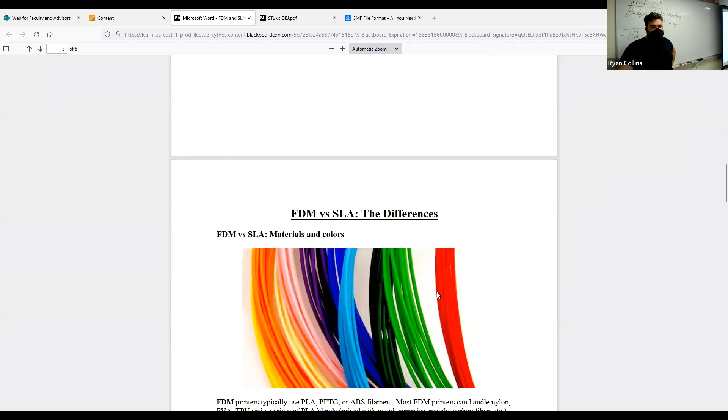You can read through this article in more detail, but that's essentially how it works. They're very similar in how they work, but extremely different in the materials and costs. One of the main differences, as we go into here, is materials and colors. This article is a couple years old now, so there have been vast improvements and changes to a lot of this stuff.

Your FDM printers, your filament printers, will print a variety of stuffs: PLA, PETG, ABS, which are the most common ones. There are also different types now, like nylon, so it'll actually print functional objects as well. Your standard prints—PLA, PETG, and ABS—while they can be strong, these materials are still very much meant for prototyping.

They can be used in low impact purposes, things like phone holders or odd desk projects. But you cannot go print a car part and take it directly to use—well, actually, yes you can, because some people print car parts, things like air ducts and shifter knob caps. So for low impact stuff, you're good, but you cannot print an engine part in these plastics. Again, it's still plastic, so it doesn't matter how strong it is, it'll melt.

SLA has a variety as well. They can very often do a lot of the same, but the big difference is that filament is very cheap and widely available. Resin printers—resin can get extremely expensive, and we're using a Formlabs printer, so their printer resins are proprietary, meaning they are the sole supplier of those resins. You can get others, but these Formlabs resin printers will not accept them. Other brands, other makes—PRUSA now also makes their own resin printer.

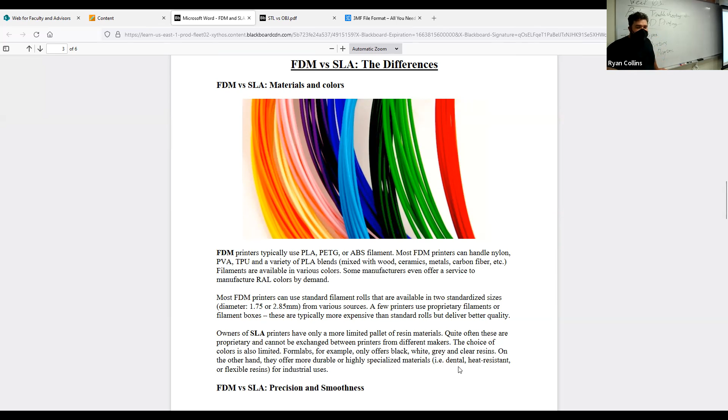So those are the real pros and cons, the big difference. Filament printers are a lot cheaper to operate, not as high quality, tend to have larger build volumes, and a wide variety of materials. SLA printers are much more expensive to operate, but also much higher quality prints, much smaller capabilities. I can't really say the materials are not wide—there's a wide variety of materials for them too, but they are vastly different.

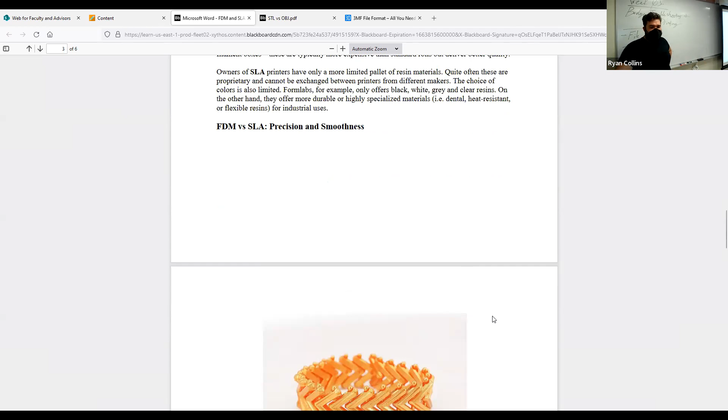So that's essentially the thing, and that's what this goes into here—precision and smoothness. The FDM printers, the filament printers, can be really quite detailed. It is generally quite surprising how detailed they can still get. But again, the SLA resin printers are going to be much higher.

We have some elements of adhesion and removal in 3D printing. One of the main functions of printing is, like I said, it goes layer by layer, so the most important part is that first layer—your object sticking to whatever print bed it has. These PRUSA printers actually have a magnetic table, so you can lift the metal sheet off and it flexes a little bit. Don't bend it in half, but you can flex it slightly. Especially if you have a larger platform, like this first project, it will flex and pop off very easily.

This MakerBot has a rigid platform, but the platform is removable, so at least you can take it out and scrape it off pretty easily. The resin printers do not have either of those.

You can remove the entire build platform, but then you have to scrape it off with a metal chisel or scraper. You don't want to gouge it, so be very careful, because it's a soft aluminum platform. At this point, resin printers are starting to develop aftermarket kits with that same flexible platform capability, making it easier to remove prints.

So, different stuff for post-processing. Filament printers will often have supports, which look like scaffolding around an object. Since we live on Earth with gravity, the printer deposits material and needs a place to deposit it. If your object has an overhang, something hanging out into space, it needs support there. Resin printers have the same issue, only they print upside down - same issue, different orientation. All that means is you have to clip the supports away and potentially sand them smooth.

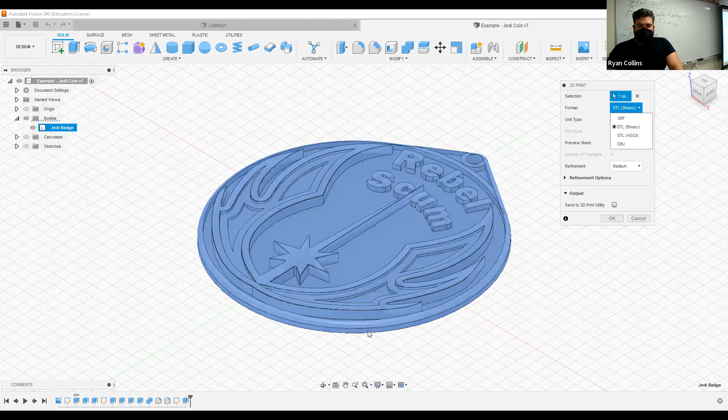Let me switch over. First and foremost, object file or STL. What is the point? What do they do? There you go, you're saving it as a three-dimensional model.

Basically the differences on these, and these are all universal, any of the formats can translate into the slicer programs. Doesn't matter outright, but I need you to know the differences. So an STL, it is the simpler of the two.

Ultimately, what it does, as it says, stereolithography, it's a standard format for CAD software. What it does is it converts the entire model into a series of surface facets and faces made up of triangular faces. Now, the more complex the object, the more faces, ideally.

The downside of that is it isn't really capable of high fidelity. If you have a more complex model, it can do that. It can work perfectly fine, but depending on the quality of the model and the quality of the save, it can start to tessellate, which means it has a variety of broken surfaces and such.

However, it works perfectly fine for simple models, especially with this. We're working with a series of flat surfaces, so really a non-issue, or essentially flat surfaces.

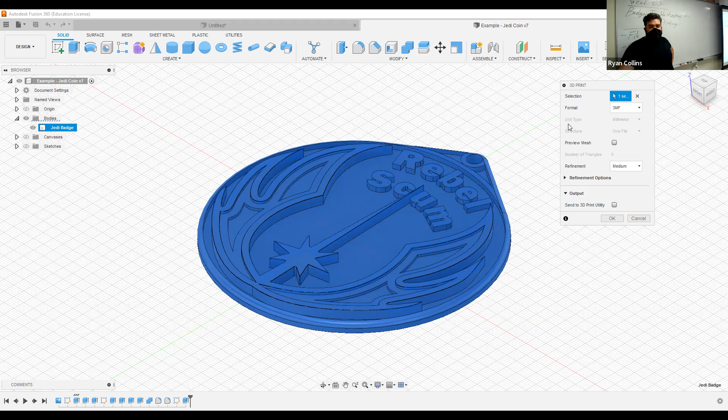All right, so roundabout, selecting file format, 3MF. Okay, let's put it in. I'll just put downloads, Jedi badge as a 3MF. Save. Okay.

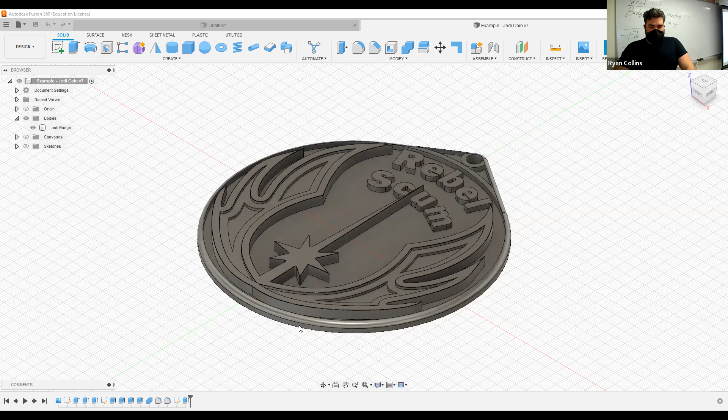All right, so I've saved my file now. Let me just go to full screen share here. So we're going to bring up, oops.

First, the slicer programs we're using. First up is PRUSA. I just updated all this, so it's giving me all the stuff.

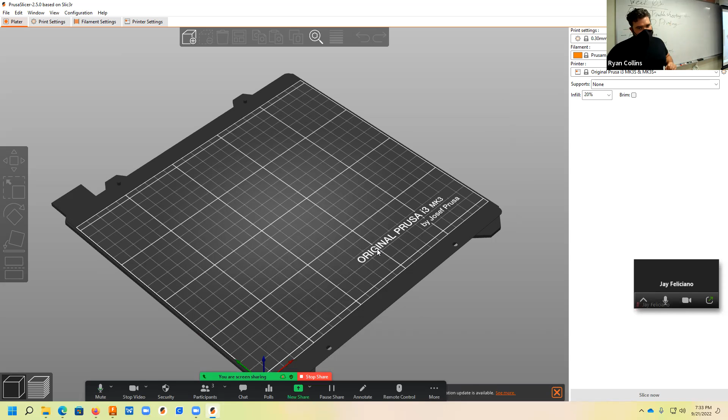So this is the two PRUSA printers we're using here. First up, you'll see if it is formatted properly, it is a virtual rendering of the print platform. The great thing about that is you get a sense of scale of your object. Let me bring in my object.

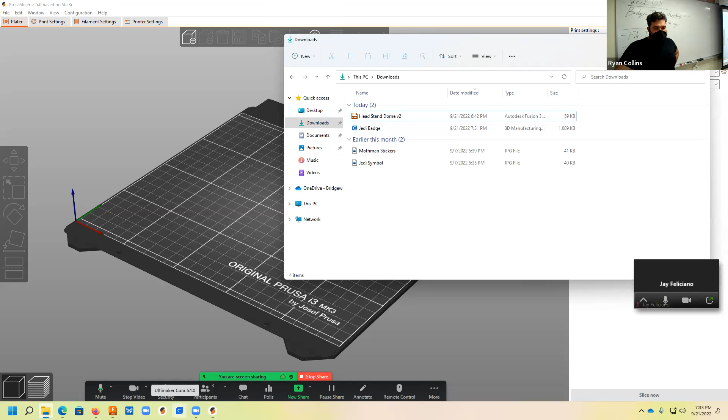You can, of course, use the file search or just drag and drop. Either one works. Open up, Jedi badge. Now currently it has a little C icon because this computer is set up to use CURA as its main one, but same diff. Drag and drop, plop.

So right there, you can already see how big this is relative to the scale. The print bed is, I believe it's 220 millimeters across by 180 deep, or 200, I can't remember at the moment. But this is also why I was saying that sticking with metric is a good idea, because it translates more easily into these slicer programs.

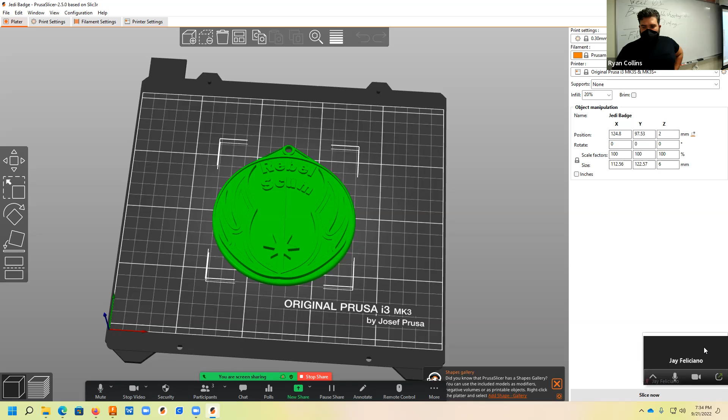So what I have here, let me get a better view switching over to actually the PRUSA. This is the virtual environment. I can see how big my object is. If you wanted to resize any of that stuff, we can do that.

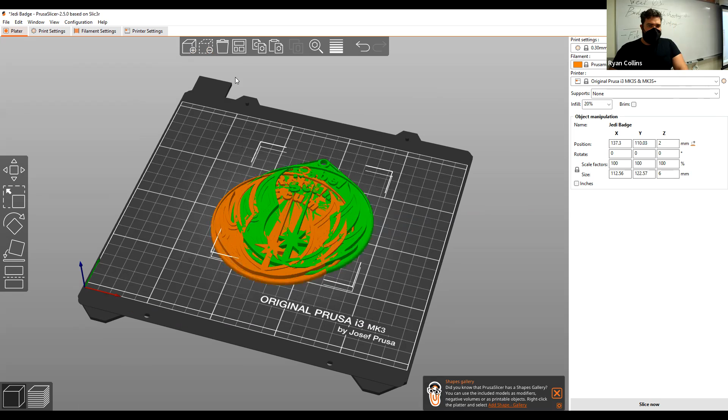You can also arrange multiples. I can either use the plus minus symbol here, or select the thing, copy and paste the second one. The icon up here is arrange, or press A. It'll automatically arrange for you. But you might find times that you're going to need to arrange these manually.

That's fine. So let me just delete one of those. Use the arrange tool again. So to get you familiarized with the general format here, one, you have your standard plater tab.

Second is print settings. Third is filament settings. Oops, wrong click. Fourth is printer settings. For the most part, we're just going to be using the plater and occasionally the print settings.

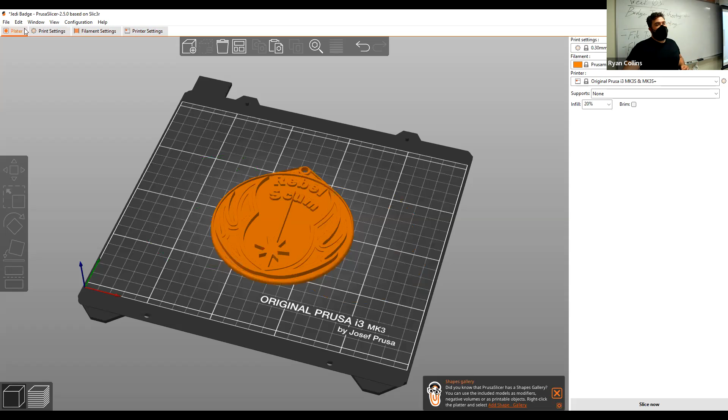Once all this stuff is grayed out, you just have to select your actual object, then it'll bring up stuff. So you have your move, standard move, or you can just click and drag it around. Now with this, it automatically will bring whatever face it is modeled in your program in as, in the same orientation.

If it's differently oriented, it'll bring it in as it's oriented in the program. So if you built it on your XY plane, it'll bring it on this. If you built your object on the XZ plane, it'll bring it up flat in front of you.

So if that happens, you have the other options here, scale. You can grab it. You have these different cubes, which relate to the different axes. Green, still the Y-axis, front and back. These are going to, if you grab just one, it's a non-uniform scale, non-uniform squish. Don't like it? Control Z.

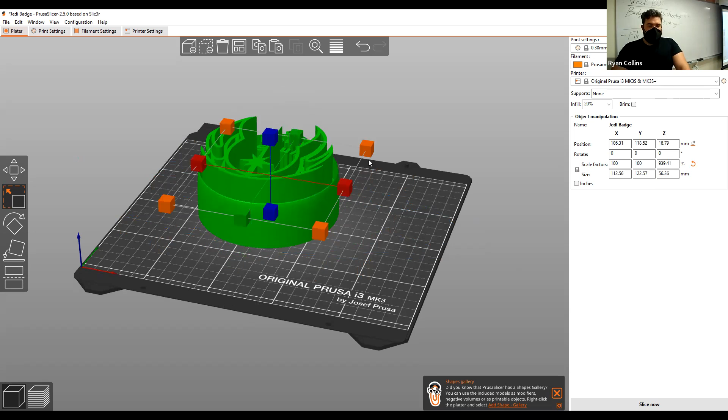X, still the X-axis, still left and right. Same deal. And again, Z, vertical stretch. Now it's like a big cake. The outliers, the orange, that's your uniform scale.

Alternatively, go on to the platform to the right, the tool selection at the right. Let me just Control Z that. You have position, that is moving. So if you want to put that numerically, you can do so.

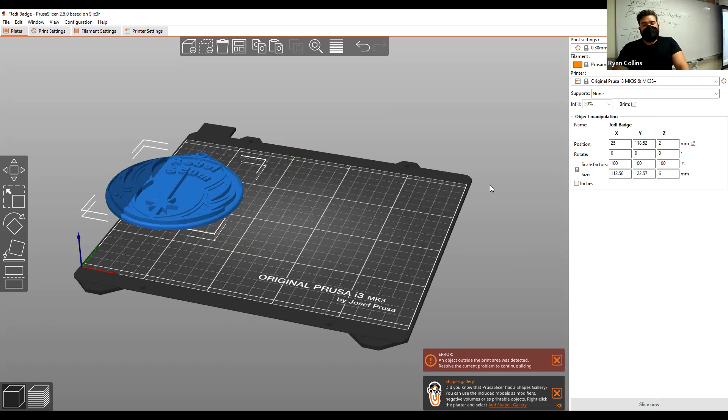Say, I don't know, 25. Snaps it all the way over there. It's selecting from the center. So don't use that. I would recommend if you need to move it around, just drag it around. You can again drag it.

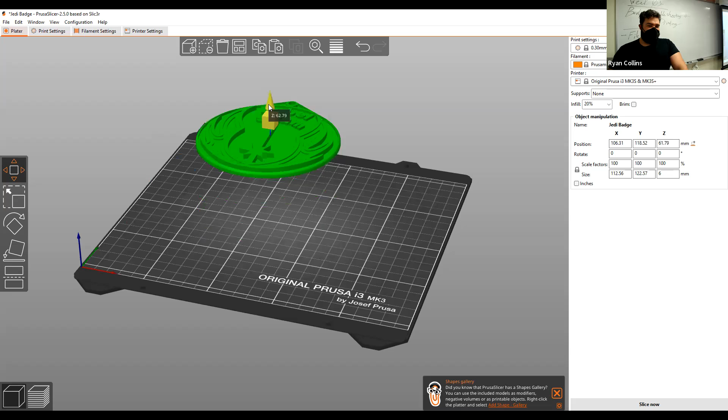However, it's only going to move in 2 directions. It will not move up and down. That you actually have to grab one of the move tools. So select the actual move thing. You can then use the Z-axis cube to move it up and down. No need, there you go.

Rotate can be done numerically the same, or you can use the move tool. Right below is the actual rotate tool. So you click that, it brings up multiple orbits, so it allows you to rotate that sort. So if you need to do that manually, any of that.

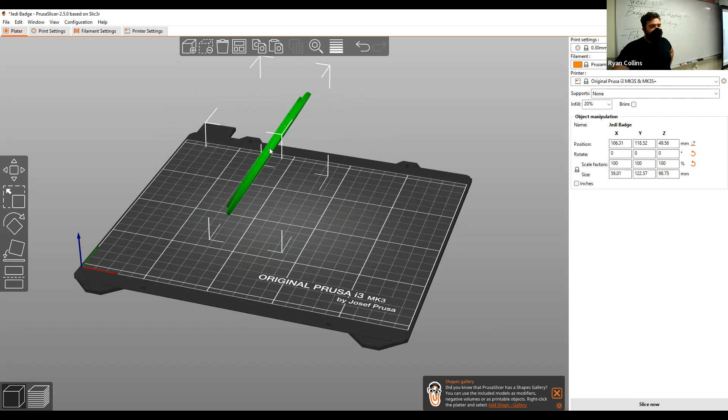All right, next tool, very handy. Say you have modeled your object or whatever it is, however it's been imported, it's on a weird axis. Well, I don't want to print that way because that would be a hell of a waste.

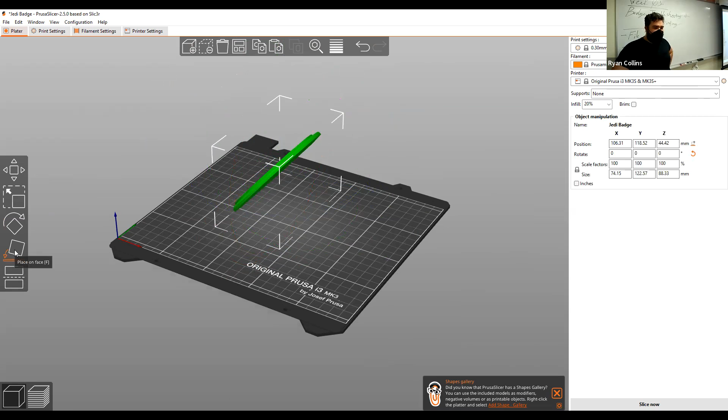Make it as efficient as you can. Now I could grab this and try to orient it so it's flat, but don't waste your time. PRUSA has a selection box, third or fourth one down, place on face. Select that, rotate around, and you can see it highlights these general areas. I can select just that and it'll snap it to the bottom. Very convenient. Alternatively, if this is upside down, there you go, snap that way. But I want it that way, so there you go.

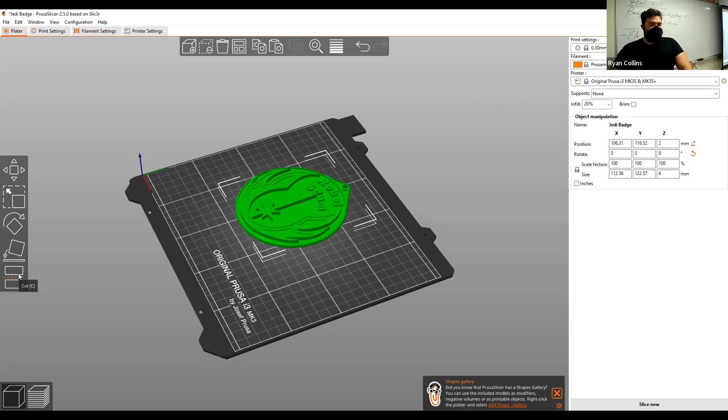And the last option is cut. We're not really going to be using this right now, but this is so if you wanted to, especially with something that is just straight extruded, you could place a slice in there and you'll actually cut your object into two or more pieces.

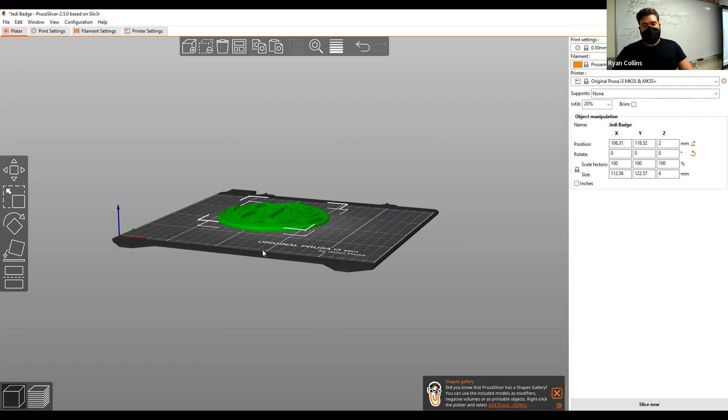Or that is also how you can develop stop points if you wanted to change out filament to get a different color. None of these are set up for multi-materials, so you're gonna select a filament and it's gonna print that as one. Can you change out? Yeah, but you have to do it manually. That's all.

Okay, right side is your fidelity and different selection materials, that sort. So upper right, drop down. Same thing as printing a paper on a regular draft printer. Do you want it high quality so it takes a while but uses a lot of ink and takes up more time? All right, pick quality. If you just want it to spit it out as fast as can be done, pick draft quality. 0.3 millimeter layers - these numbers relate to the increments of height for each time it prints a new layer.

Don't use the ultra fine setting, because the extruders are not set up for this. We would need to switch to a different nozzle that can print better at that. Otherwise, it's just going to gum up the works. I have really found no real difference, at least for most of the models we've been using, from the standard high quality, which is 0.15, versus the 0.2 quality. Same with the speed, it's just going to cut a couple of corners. If you're just trying to knock it out as fast as you can, use draft.

Second selection down is your material. We will be going over the materials here in the room, but for the most part, we have PETG and PLA. PLA is your standard run-of-the-mill, cheap, with lots of color options, and it's perfectly fine for most prints. It's not the stronger one, but it prints perfectly well.

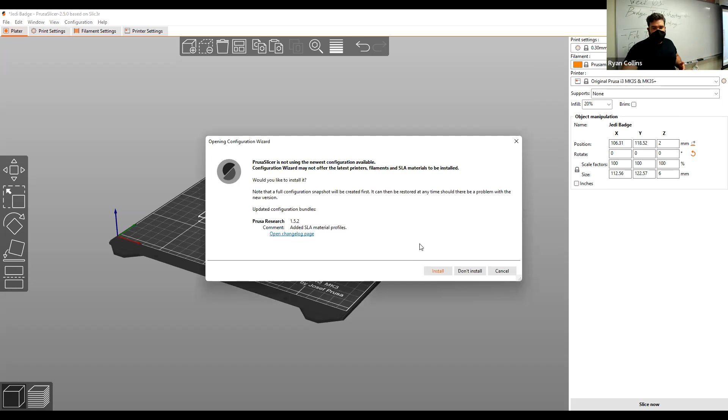Your other selection, generic - oh, I didn't add more filaments to this, so I'll have to do that. What? Don't install right now. Come on. Hey, okay, fine. Yeah, just select a lot of them. Hold on a second, let me pause the recording here. Okay, so sorry about that, had to update, it did not already have these pre-selections in place.

Now, the reason you need to make sure that you select the type of material, not just color - color is, for the most part, irrelevant. These color swatches are simply there as noting whether or not it's generic, PRUSA, that sort of thing, just the different makers, doesn't matter. The material type very much matters. They all melt at different temperatures, and they will need to be programmed for such. The slicer program does all that for you, but you will need to make certain to select which is which.

Note that, again, MakerBot will only print PLA - doesn't matter what type of PLA, but it will only print PLA. PRUSAs will print any of it. So we're using mostly only PLA and PET. PET I have found to be stronger, with just as many color selections. The other difference is that PET is more readily recyclable. Now, that doesn't mean you can just throw it in the recycle bin, but it can be repurposed within itself to make more filament. That's actually something we're looking into for having here on premises on campus, but that's another thing.

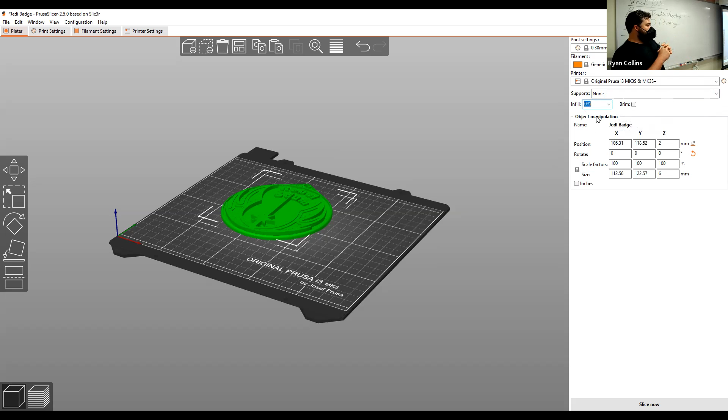If it's selected to 0, you're just printing the shell. Otherwise, think of like bird bones and such - they have some kind of webbing in between. It's not a solid bone, but it's not overly dense. It's kind of mushy inside. That is kind of sort of what the infill is.

And I say kind of sort of because you can select a different variety of actual types. The percentage, going from 0 to 100, is how dense that is. At 0, it's just a hollow shell. At 100%, it is a solid chunk of plastic. Wholly unnecessary - for what we're doing, 15 or 20% is plenty fine. There you go.

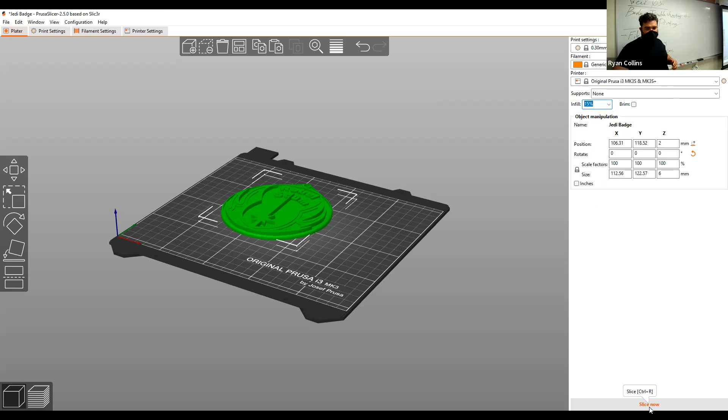From there, you'll select Slice Now at the bottom, and you'll see it has completely changed colors and all that. There's a legend up here on the left that tells you what we're looking at. I can orbit around and zoom in. Now it's all lines and wavy like that because it's actually representing what the tool path is going to be, what the extruder path is going to be.

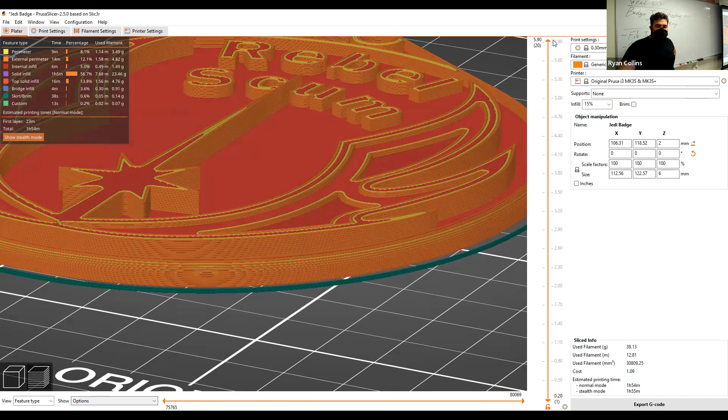I can use this slider over here, drag it down, and it will cut through the layers to show you what it looks like inside. It's just lagging a little bit as I print. Sorry, my computer is very laggy.

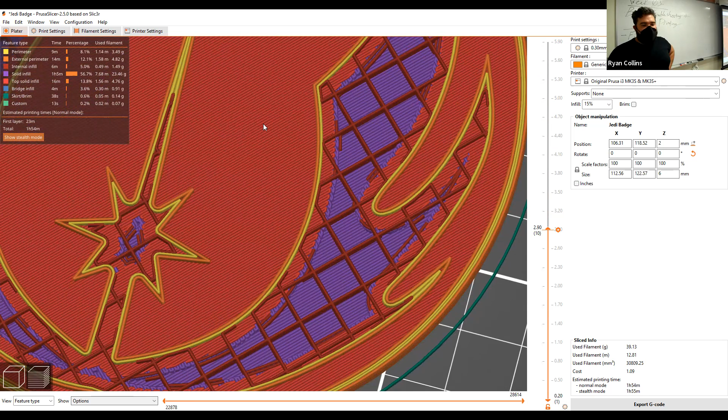So right now it is set up as a grid. That is what is inside the layers, that's what's inside the walls there. Pretty neat. You can change that up by going to the print settings, going to infill, and the fill pattern.

There are a lot of different options. You can leave it as the rectilinear grid - that's fine. I like to use this gyroid, or gyroid, however it's pronounced, whatever.

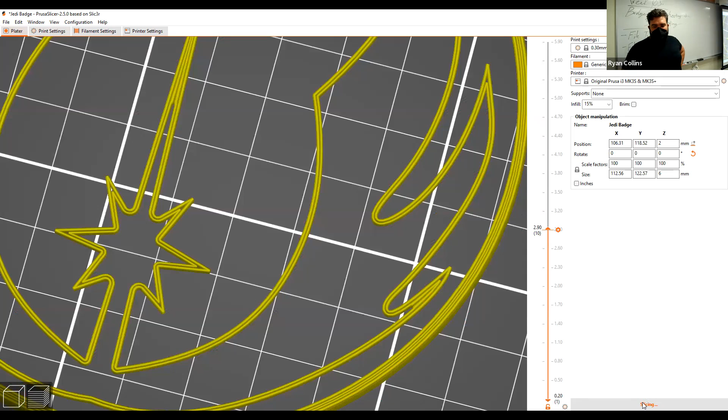Slice, and you can see it's all wavy lines now inside. All that means is instead of having to start, stop, and make a bunch of individual squares, the gyroid makes a parametric flowing form in between. So it just speeds it up a little bit.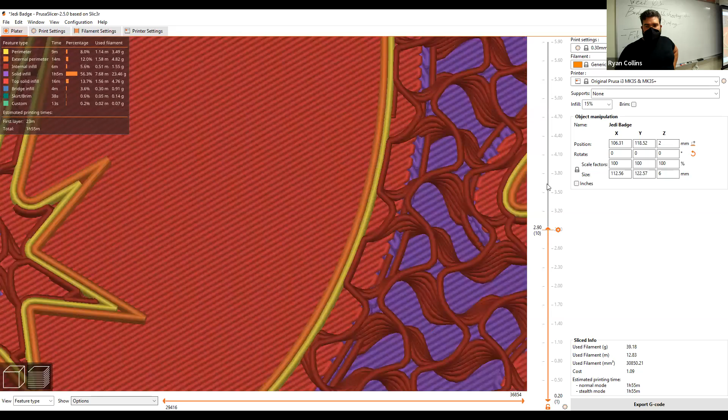That's all. From there, I'm going to drag it all the way back to the top - doesn't matter. From there, you go to Export G-code and save it wherever your file is. Now, two things.

G-code is the standard of machine coding. This is the same type of software coding that goes into a 3D printer, or can go into any kind of CNC manufacturing machine - CNC lathes, milling machines, all that kind of thing.

Same diff. In this case, 3D printer, using the PRUSA Slicer, it will also tell you in the file name so you don't get them confused. It'll tell you what the thickness is - 0.3 millimeters. The material, PETG. It is made for the PRUSA Mark III's, which is what ours are. And it'll tell you how long it's going to take.

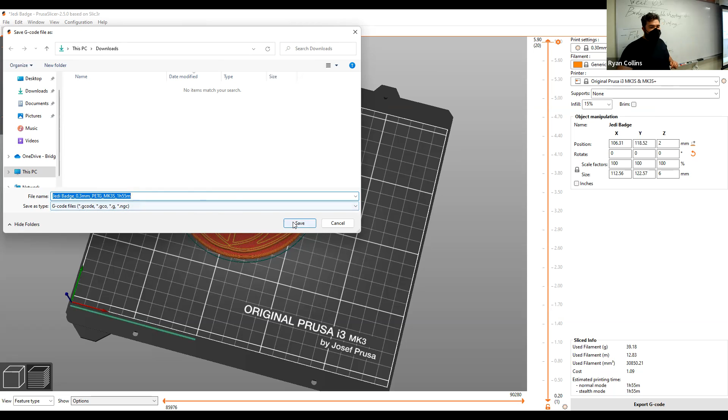So this basic one, which is already in there too, just under 2 hours. Hopefully. So that's it - it's available now, a moment.

The PRUSAs do not have internal memory storage. You have, and it uses SD cards. I've made these little tags on the back - they're just hot glued on there. It's just your standard SD card, 16 gigs each. Each one of these could carry years worth of students' work.

It's not - the file types are very small, but you need to load your prints onto an SD card and insert it in the printer.

The MakerBot does have internal storage, but you can use a flash drive, a USB drive, and load it onto there - works great. The SLA printers have internal storage, and they have to be connected to the computer because you can upload it directly. You can still work off a USB, but those are set up to use directly.

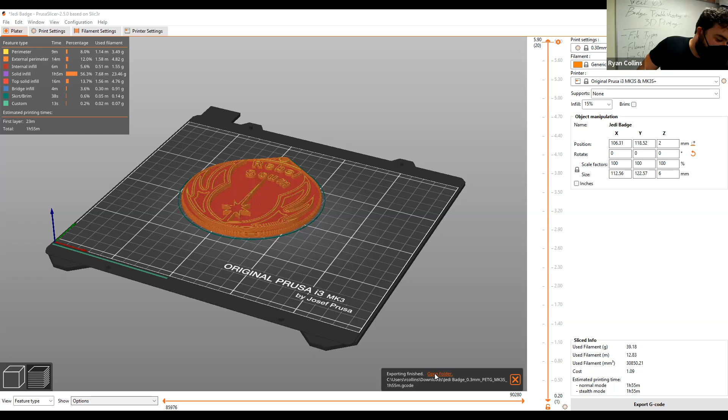So with this one, you load onto here, and I'm going to go into the details of how to actually print in a moment. But for the time being, if you would like to, you can get this PRUSA Slicer put onto your own personal computer, or you can use either of the kiosk computers. They are set up - if you do not have an SD card reader, these stations are set up. This one is not.

With a couple of adapters, SD card readers on the bottom, you just plug in and drag and drop. Obviously, you've got to plug it into your computer. If you want to load this onto your personal computer, it's at prusa.com.

Let me switch over to this. Sorry, I thought I already had this pulled up. But no, it's at Prusa. It's Prusa software, dang it, I forgot. It's Prusa 3D, they got bought out, or somebody else had grabbed the Prusa name first. Yeah, that happens. Sorry, I'm just trying to figure out which one it is.

There we are. So if you want to download the slicer program yourself, go to Prusa - it's not Prusa.com, it's Prusa3D.com. I'll be putting the links for this stuff onto Blackboard, but you can just go to software and download the slicer for whatever your operating system is - Windows, Mac, Linux, whatever you want. And it works from there, works really well, it's a good program.

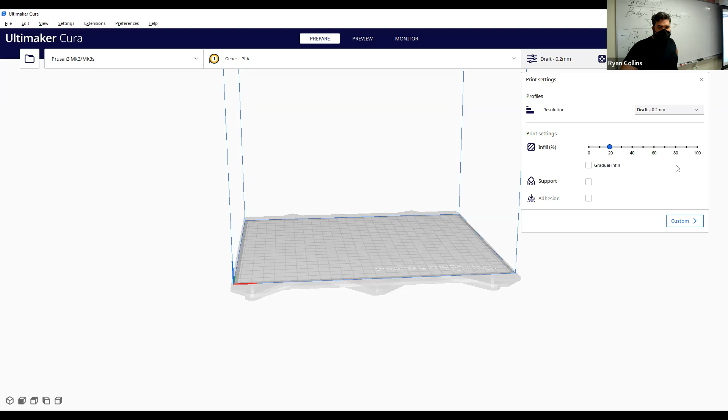So let me bring up, now that it is opened, the difference - here's the format. After explaining the Prusa one, you can pretty much get the gist. You can load, same thing, you can select your printers. In this one, I've already set it up for either the Prusa or the MakerBot Replicator. I don't think it's actually this one, I'm gonna have to test it.

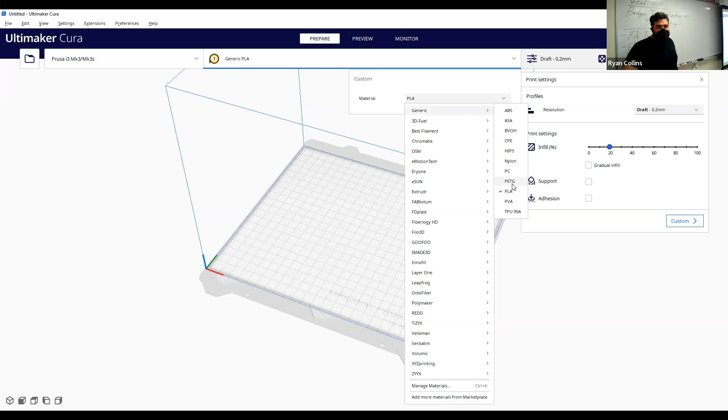But you can see it's a virtual environment of the print bed. Same deal, you select your printer, select your material - PLA, lots and lots here, but we're just going to stick with, if you're using Cura, just stick with generics, it works the best. It's the best selection, and that's largely what we have. But the ones we're using is either PLA or PETG. Same diff though, and then same here.

You have your fidelity here, so you've got your resolution - again, draft, coarse, super coarse. I've not tested the extra coarse on this yet, so I can't tell you how coarse that really is, but I'd probably stick with, like, I wouldn't go any further than draft, maybe coarse. I don't know, you can see by the layer types though.

Draft on this one is 0.2 millimeters, whereas Cura - or I'm sorry, Prusa was, the layer height was 0.3 for their draft, and Cura is 0.2 on their draft, for the same. 0.3 is at there - Cura is extra fast for 0.3 millimeters, and it's the same as draft on Prusa.

So just note the actual layer heights, that's all. Same thing with infill - you can change the infills differently. Supports, we're not really needing that, and you can ignore adhesion because that's unnecessary for these. So you've got a bunch of different controls and such. I have found when I've used Cura to print on Prusa, sometimes it causes weird bugs - really just like adhesion, or it slices it a different way. It's not a bad way, it is simply that the dedicated Prusa slicer works better for the Prusas.

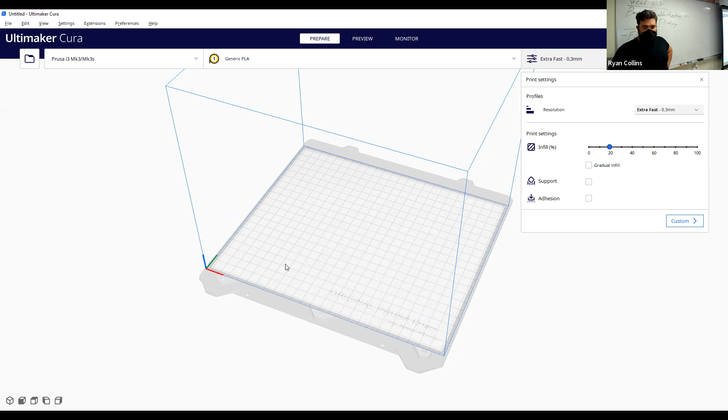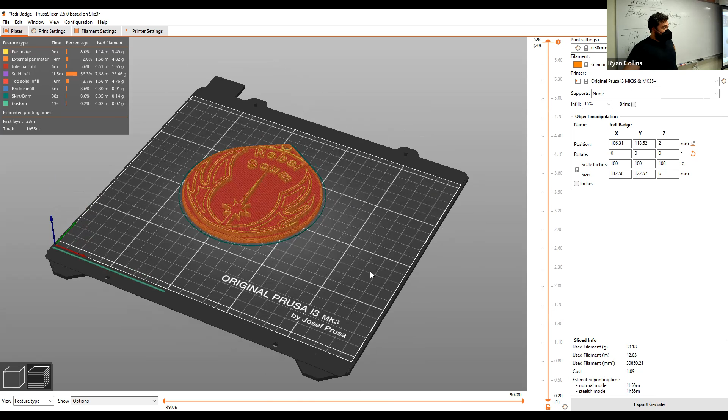That's all, so I'd recommend that. So I'm going to record a demonstration for the actual printers later. This video will simply be for discussing the printing or the slicing process and all of that, and exporting and then saving onto an SD card. I will go over the actual details in a different video, so I'm going to stop the video here. Everything's pretty self-explanatory at this point, and if you do need help, the forums are excellent help. So best of luck with that stuff.